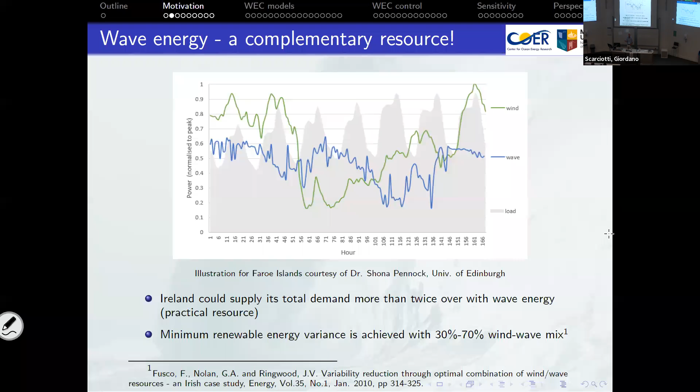Now it's not always the case that wave and wind are uncorrelated, and when waves are generated by local wind, they're highly correlated. But for example, on the west coast of Ireland, the waves come from storms and weather systems that are in mid-Atlantic. So there's actually quite a low correlation. And to minimize variability on the west coast of Ireland, we would have a mix of 30% and 70% between wind and wave. So it's predominantly wave. Wave and wind are both variable and unpredictable, while tide, for example, is variable but predictable.

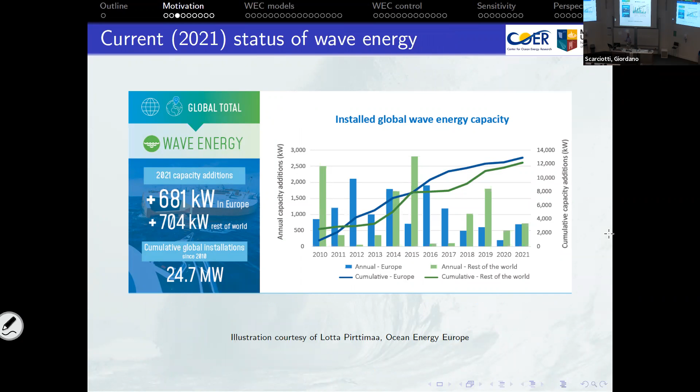In terms of the amount of installed capacity, it's very low. I mean, the total global installed capacity is actually lower than the 24.7 megawatts on the diagram here, because that doesn't include the systems that have been decommissioned. And even the aspiration in the future is not that high. I mean, 500 megawatts by 2030 is really only the size of a medium-sized power station.

The important aspect here, though, is the cost. So the figure of 110 euro per megawatt hour would correspond to about 11 euro cent per kilowatt hour, which is about half the retail rate at the moment. And it would probably bring wave energy into a competitive line with, say, offshore wind. Onshore wind is probably a little bit lower than that.

So really, it's about the cost of energy. Of course, the wave energy resource itself is free, but the cost of converting it is not. So it's really about maximizing, and it's not an efficiency issue either. Some people who work in this area get obsessed by efficiency. It's really purely a cost issue.

So why is it so hard to harness wave energy? Well, the energy in waves is a mixture of potential and kinetic energy, and therefore there are a variety of principles that you can use to harness it. And it's not clear what the optimal harvesting principle is. It depends whether you're in deep water or in shallow water. And there is absolutely no technology convergence. There have been over 200 prototypes reported, and they all look a little bit different.

One of the difficulties is that the energy flux is reciprocating. So at some stage, in order to use it usefully, we have to rectify that either at the hydrodynamic stage, the mechanical stage or the electrical stage. High force, low velocity; generally electrical generators like high velocity and low force. And also there are mechanical stresses, which often lead to over design as well.

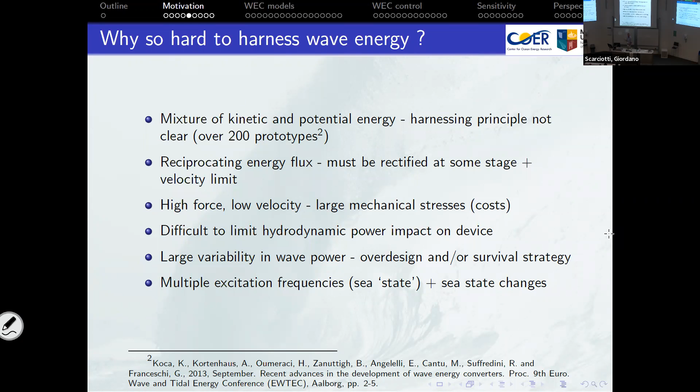Finally, the excitation that a wave energy device receives is across a range of frequencies. So all of this breadth of operational domain makes it quite hard really to get a device that can be well tuned to the local conditions.

So as promised, here are some pictures of wave energy converters, and they all look a little bit different. On the top left, we have an oscillating water column. As the waves go up and down inside the chamber, they induce a reciprocating airflow through the turbine, and people have designed clever turbines that turn in a unidirectional way despite the bidirectional airflow.

On the top in the middle, we have an overtopping device. It has a nice feature that the direction of flow through the turbine is unidirectional, so no other rectification is required. But for example, a 1 megawatt device of that type, which was deployed off the coast of Denmark, has got a 200-meter span and is really quite fragile. Top right, we have a heaving buoy, a two-part buoy where one part moves relative to the other, with a loose mooring.

On the bottom left, we have a flap type device, which is normally anchored in shallow water, and it uses the surge motion of the device. While on the bottom right, we have a hinge barge device where the central platform has got a heave plate to minimize its motion. And then we have relative pitch between the two end pontoons and the central device.

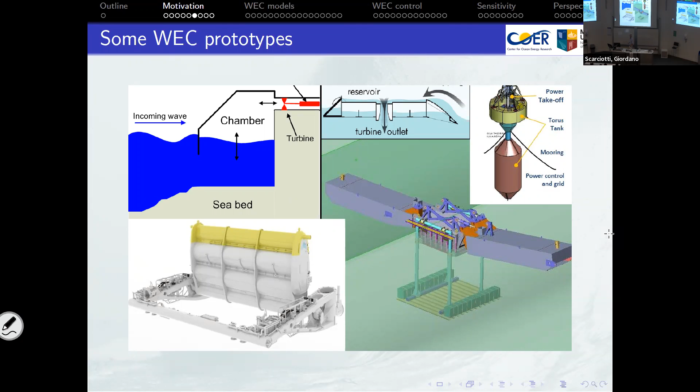I'll also give a special mention to this one. This is a device which has really only been considered for the last 5 or 10 years, and it's a lift-based device. So it probably has characteristics closer to aerodynamics than hydrodynamics. And one of the things that makes it interesting from a control systems point of view is the number of different control actuators that you can use.

We can vary the generator torque, as we can with most wave energy devices. But here we can also pitch the foil angles, and we can do that either to maximize power, but it also gives us a mechanism to spill power. We can also submerge the device by controlling DS, the depth of submersion. And finally, on some of these devices, we can also change the radius.

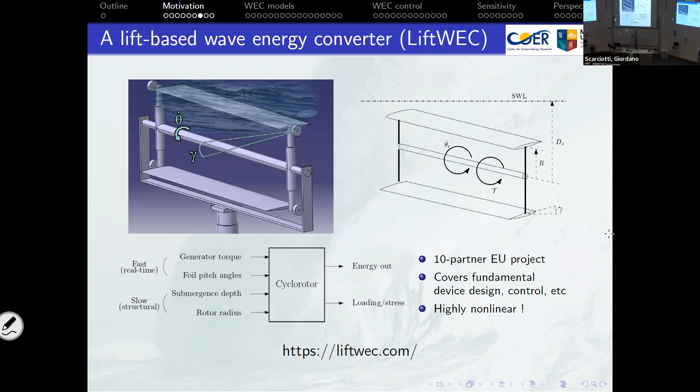Now, some of these are fast acting control mechanisms and some are slow, but it gives us a lot of freedom to play with. It's a 10-partner EU project. Our participation is on the control side; a highly nonlinear system, but it's, again, one of 200 different prototypes.

In terms of the wave resource, the wave resource is multi-frequency, and on the left, you can see the different wave spectra that result from different winds.

And we're assuming here that there's sufficient fetch for the waves to build up, and also that there's sufficient time for the waves to build up. So therefore, what we call a fully developed sea. But these wave models can be a little bit simplistic. So on the right-hand frame, you can see that we have a wave model from a Pierson-Moskowitz wave model, but it doesn't actually represent the sea state particularly well.

We have generally got some summary statistics that describe these wave models. So H1/3 is the average of the 1/3 highest waves, and that actually comes from historical reasons from sailors' observations, and that's equal to HS, which is the significant wave height. And then there's a sort of bulk measure of the period of the wave, or a representative measure, either TZ, which is the primary zero crossing period, TP, the peak period of the amplitude spectrum, or TE, which is the peak energy spectrum. And there's an example spectrum, which is Bretschneider.

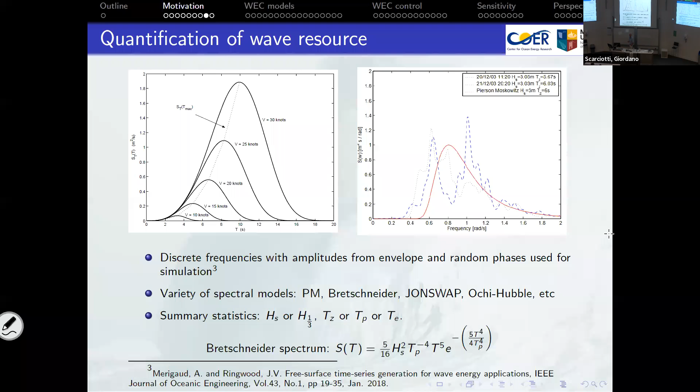So the challenge, and this ultimately is the control objective, although it needs to be distilled down to something that's a little more manageable, is to reduce the levelized cost of wave energy to compete not only with non-renewable sources, but also with renewables. And I guess the reason that I'm talking to you here today is that I believe that control technology has got a high role to play in reducing that levelized cost of energy.

Generally speaking, this LCOE term here is distilled down to energy converted, which is something that's more tangible in terms of control objective, but we also need to be aware that the control actions that we take may also affect the operational costs as well. In general, there isn't a huge relationship between control actions and CapEx, other than the addition of maybe some sensors and actuators. And maybe it trivializes things a little bit, but control is primarily a design exercise that involves implementation and software, maybe with the addition of some extra sensors and actuators.

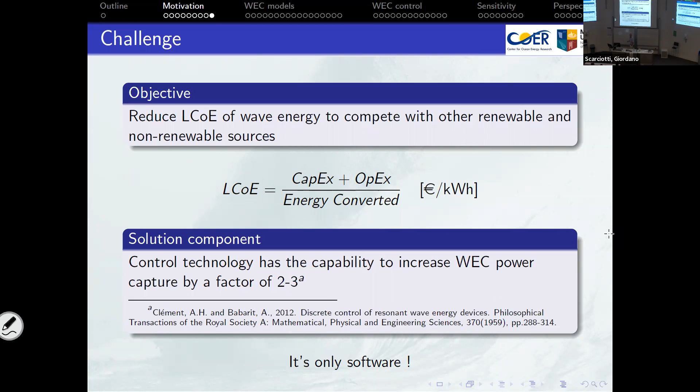So compared to the capital cost of a device, which would typically be maybe €1 million per megawatt, the addition of control capability that's able to sufficiently improve the energy capture performance of the device is certainly something that looks appealing. So I'm going to cover a range of WEC models, wave energy converter models, starting with the most complex and then coming to something that's really very simple. So we've something to work with, and we're probably all aware of the immortal comments of George Box, and he's right. But the important part here is the useful part, and there are a variety of uses to which we can put models in the wave energy domain.

So these are some of the different reasons that we need models. Certainly, project developers would need to be able to assess power production in a particular location to see if it's an economic proposition to put a wave energy farm there. Mechanical people need to assess loadings and forces under extreme sea conditions. And then we've a range of reasons to simulate the device. And they would particularly be fairly simple models because we put them in some sort of closed loop optimization strategy. And finally, of course, which is one of our main interests, is as a basis for model-based control design.

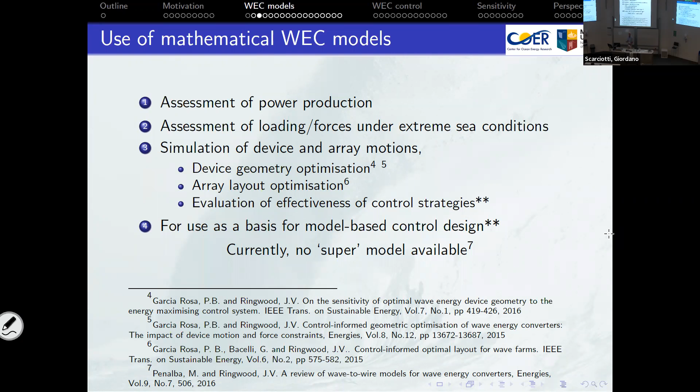One of the issues is that we have multiple changes in the form of power, and we may or may not have a hydraulic stage in here. So we may go directly from mechanical to electrical. Bond graphs are quite a nice way to model this. And of course, they have a close connection with Port Hamiltonian systems as well.

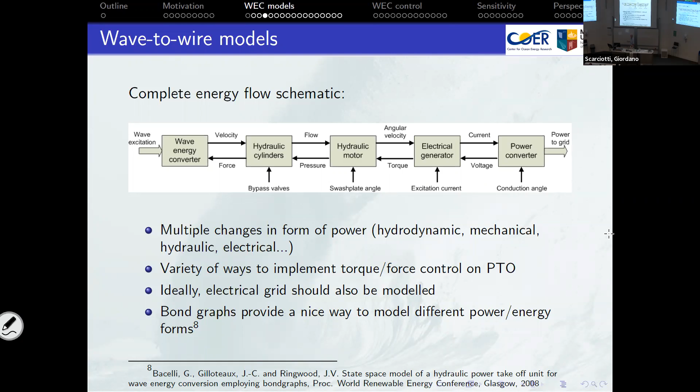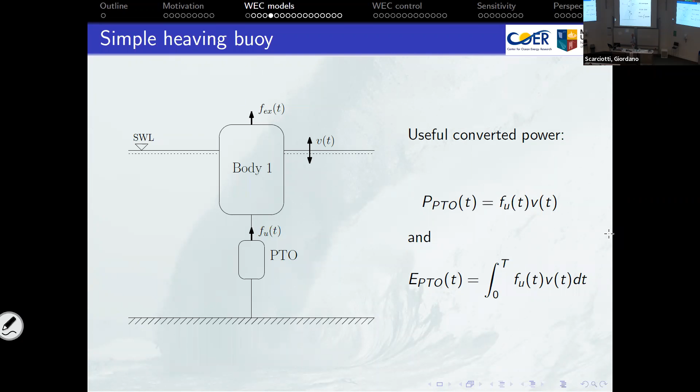And there is no known closed form solution, although I remember seeing a film, Gifted, which came out in 2017, and someone in that claimed to have solved the Navier-Stokes equations, but I haven't seen it published yet.

We can solve these equations numerically by discretizing the domain one way or the other, and there are different forms of discretization, whether we go down the computational fluid dynamics route or smoothed particle hydrodynamics. So these equations are then used to describe the interaction between the particles, or indeed the cells within here, and both of them are very computationally complex.

But we can simplify things a little bit if we just assume that the forces acting on the body are a linear superposition. We have mooring force. The radiation force is a force experienced by the device by virtue of its own motion. So devices in motion generate their own waves, and that causes a hydrodynamic force. The forces due to the wave excitation include the diffraction force and the wave excitation force. And then we have a balancing force between buoyancy and gravity. And we may or may not have a viscous damping force depending on the nature of the device. And we get to choose the control force F of U.

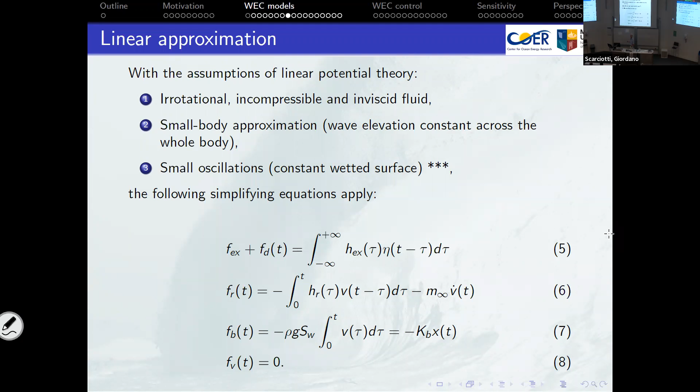So with some more assumptions, which include that the fluid is irrotational, incompressible, and inviscid, and we assume a small body approximation, which means that the wave elevation is constant across the whole body. And that's a reasonable assumption generally if the period of the wave is a lot longer than the characteristic device dimension. And then here's the really thorny assumption, which is that there are small oscillations, and I'll show you how they're really challenged in the wave energy domain. Then we end up with these expressions for these hydrodynamic forces, and of course we end up with these two convolution terms, and they form the celebrated Cummins equation.

So Cummins equation was developed in the 1960s, and is really employed by most people who work in the control area, simply because of its simplicity, but there isn't a simpler model available, in fact. We can simplify it a little bit further. Usually, instead of this convolution integral, we substitute that with a finite order dynamical model. And these quantities here, HR and HEX, are impulse response kernels that are produced in non-parametric form by one of these boundary element techniques here, and they can be produced either in the time domain or in the frequency domain.

Eta is the wave elevation, so that describes the wave excitation on the device. And again, here's our control input here, F of U. This term here, M infinity, is an added mass term. So as the device moves, it carries an amount of surrounding fluid with it, which increases its mass. So that's where that comes from. And there are a whole variety of techniques to produce this finite order approximation, including one developed by ourselves.

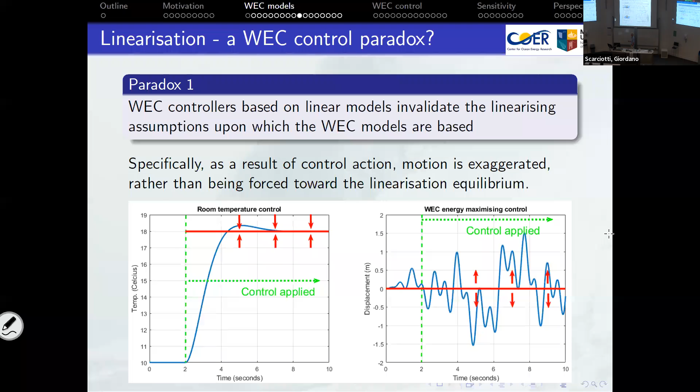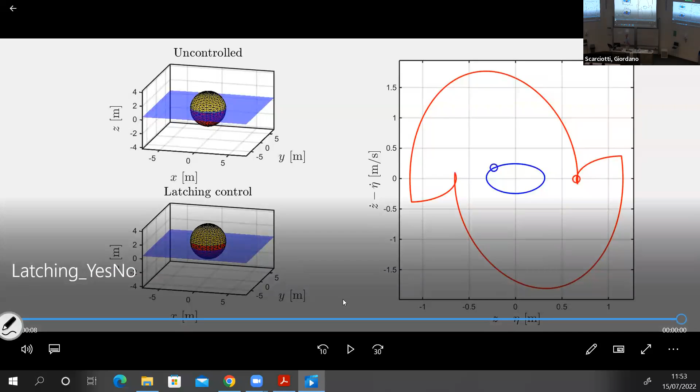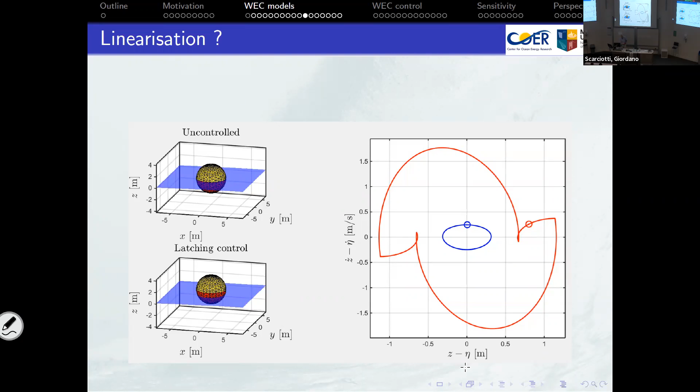So on the horizontal axis here, we have the relative displacement between the fluid surface and the device, and on the vertical axis, it's relative velocity. So relative velocity, as it gets large, generally generates viscous drag, which is a quadratic nonlinearity. And then we end up with what are called nonlinear Froude-Krylov forces, which are wave excitation forces, as this becomes large. So with a larger operational space, we're likely to excite nonlinearities, which again is a challenge for both modeling and control.

I'm just showing you a range of different modeling strategies here, with CFD being the sort of gold standard. So in terms of the computation and fidelity plane here, we have CFD here, which is the gold standard. And I'm not going to go through all these models in detail, just to mention that they increase, let's say, in complexity and in terms of nonlinear capability. But the important point here is to watch how they validate either under controlled or uncontrolled conditions.

And under uncontrolled conditions, in fact, they all work pretty well. So in terms of fidelity, they have a fidelity close to CFD. But as we control the system, most of the models fall away, with really only this one approaching the fidelity of CFD. So in fact, by controlling the system and maximizing energy capture, we're creating a difficulty for ourselves.

So this is, I guess, a picture that's familiar to everybody, but maybe it presents an alternative to getting around all these fundamental difficulties in modeling a wave energy converter from first principles. So to generate a data-based model, we have the usual considerations, except I guess in terms of the experimental scenario, we have a few unique features. We can either use a numerical wave tank, which is based on CFD or SPH, or we can have a real tank where we can control the waves, or we can go to the open ocean.

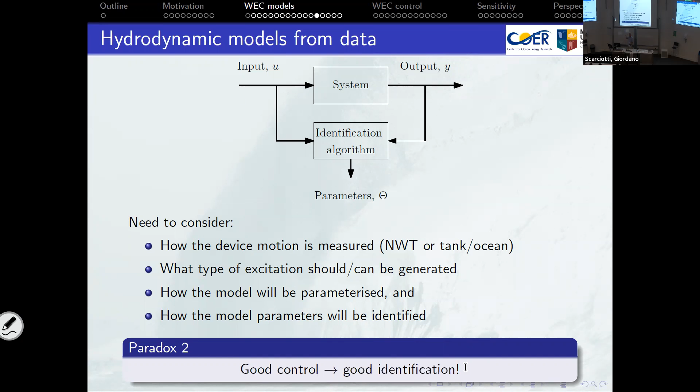But in the open ocean, of course, we don't control the waves, and sometimes it's difficult to actually measure the wave climate as well. So then we can consider what sort of excitation, and again, this is a little bit unique to the wave energy case, what sort of parametric structure we choose for the model, and then how to identify the model. But the good news here is that generally speaking, because of the aggressiveness of our wave energy controller, and indeed the persistence of the wave excitation, good control, or indeed even the benign situation, generally leads us to good identification. Whereas with a traditional control system, if we control it well to a set point, it means that it's quite difficult to identify.

So in terms of the sort of data we can take from a system to identify the model, we can use the normal motion of the system under waves, or indeed put in our own identification signal via the power takeoff system. We can do a free response test. We can have a response just to some other wave excitation or power takeoff excitation, or have a combination of these. So here we can see the different ways that we can inject things into the system.

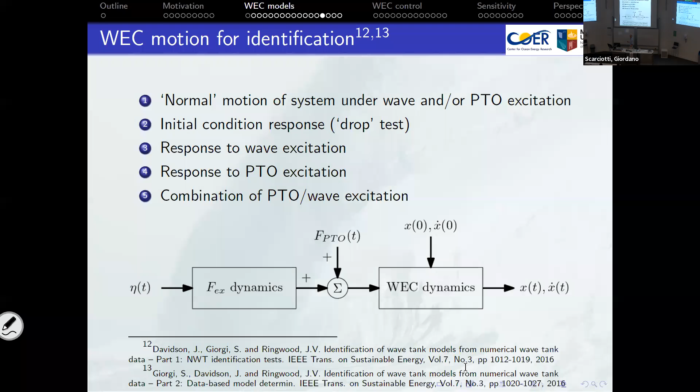So here we have eta, the free surface, through the hydrodynamic model, which gives us a wave excitation force, which adds on to the power takeoff force. And then we have the possibility again to change initial conditions. And generally, we're interested in the model here from the force input to the motion of the system. This shows the idea that rather than linearizing around the equilibrium point with the assumption of very small variation, we could linearize around the equilibrium point, but not assuming a small variation.

So we have what I call a representative linear model. And the example here is just from initial condition response tests, and you can see those here, although it's quite difficult to see how they differ from each other until you normalize the amplitude here. And then you can see that the ones which have quite a small initial condition variation, they ring a lot more than the ones from a larger amplitude, which are subject to much more damping, and that generally is viscous

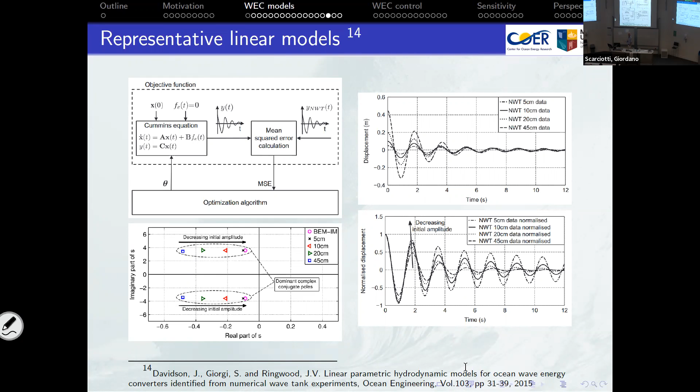damping in the fluid. And if you look at the dominant poles of the system in the complex plane, in fact, the pink ones here are the ones that you get from this sort of physical modeling through the assumption of very small variations. And you can see that when you plot the dominant poles from these tests here, they actually converge on this one as the initial amplitude gets very small. So that gives us the possibility to have a range of linear models that are good for different amplitudes, and we could either interpolate between those models or switch between those models potentially.

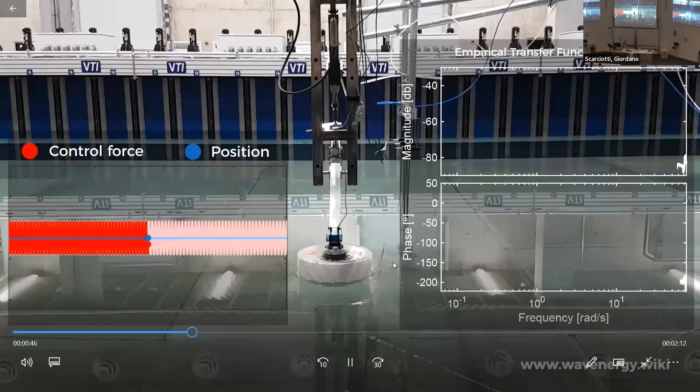So we do a down chirp, and the reason we do that is because small frequency waves generally have a much shorter reflection time. And this is a big issue in wave tanks. Wave tanks normally have wave cancelers, either the wave makers themselves actually work as wave cancelers, but also there's usually some sort of a beach that kills the waves as well. But inevitably you do get contamination from reflections.

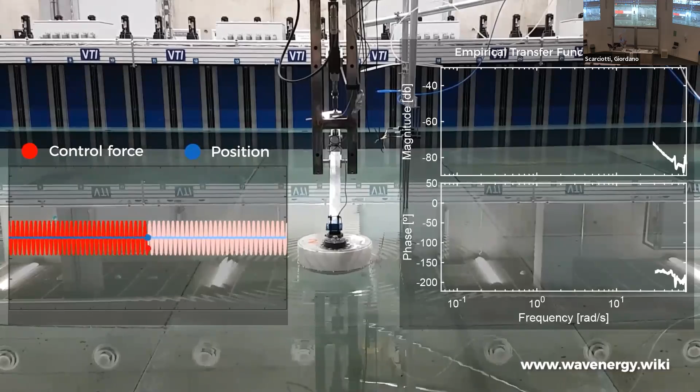So you can see here as we start in high frequency, really there's very little reaction in the device. And then as we go down in frequency and we start to approach the resonant frequency of the system, you can see that we get a much more significant response. And then as we get right at the resonance, we actually get overtopping of the device and quite nonlinear sort of behavior.

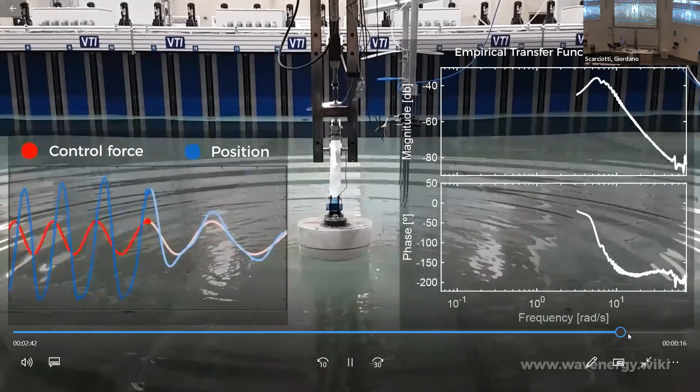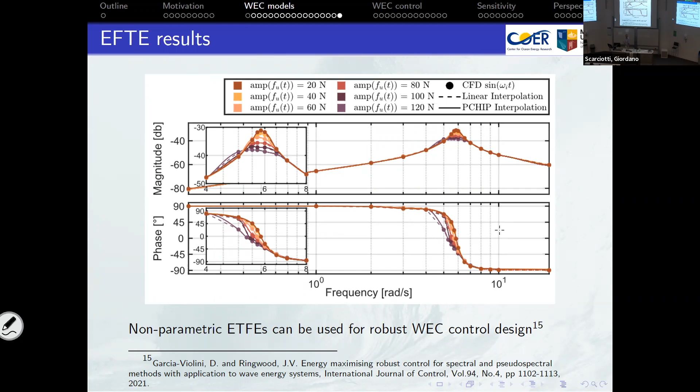And the sort of responses that we get from this are then documented here in a Bode plot. So you can see that they're documented for different amplitudes of chirp signal. So we get a spread, and they're useful for different sorts of control design, including a version of a robust control design that we've done, which is based on the best worst case analysis. But it also feeds into another form of controller that we have as well that I'll show you.

So on to WEC control then, and I'm going to start with the very basics, and some of this may be obvious to some of you, but maybe not all. In terms of the objective then, as I mentioned, the really high level objective is to minimize the levelized cost of energy. But again, that's usually distilled down to maximizing energy absorption over an interval T. Power is given by the product of force and velocity, and energy is the integral of that.

And of course, the system has got some real physical constraints, particularly in terms of displacement. It usually has a finite stroke length if it's a heaving buoy. It may have velocity constraints as well, and there's definitely a maximum force that we can induce with the power takeoff as well. And then finally, there's a somewhat unique constraint that we might need to apply as well, which is a constraint on reverse power flow. And you can say, well, why would there be reverse power flow? I mean, surely we're trying to harness energy rather than put energy into the system.

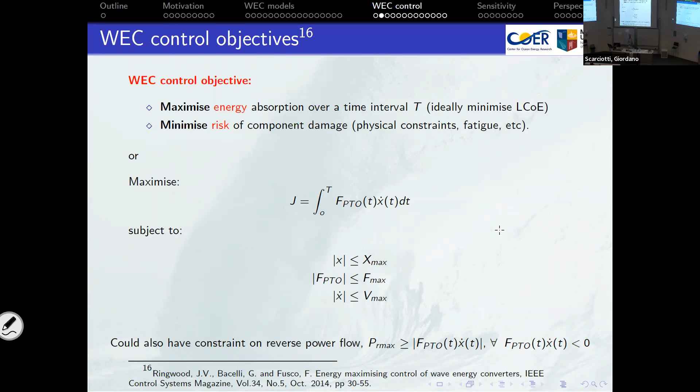But it turns out that even for a simple harmonic wave, there's a period of that wave that if you inject some energy into the system, you actually get more back. And it's very similar to what a child or indeed an adult does on a swing, that you kick your legs out at one point in the cycle. And the timing of that is absolutely crucial. And by putting that energy into the system, it then sustains the motion. And the reason we would put a constraint on it is sometimes these reverse power flow peaks are actually higher than the rated power or the forward power capacity of the system. So that's why we need that constraint.

Okay, so in terms of the fundamental contributions to wave energy control, they arrived in the 70s from the likes of Stephen Salter at the University of Edinburgh, and Kjell Budal and Johannes Falnes at NTNU, and David Evans from the University of Bristol. But it's interesting that Stephen Salter and Kjell Budal, Johannes Falnes were all from departments of physics, while David Evans was an applied mathematician. So there's certainly ample opportunity for control people to get involved and to look at this in a concerted way.

Their initial focus was on monochromatic waves, and there are all sorts of parallels, in fact, because we're dealing with resonating systems in AC circuit analysis. And in fact, at a workshop in Torino 2 months ago, somebody reinvented the Smith chart. So those of you who have an electronic engineering background will be familiar with the Smith chart from electrical transmission lines. But this guy who had his background really in hydrodynamics had no concept of it, and reinvented the wheel in a different domain. And it's not unusual in the wave energy community.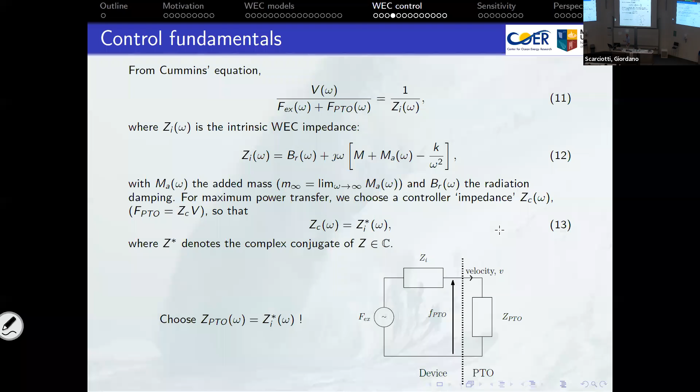And this is termed the intrinsic impedance of the system. So it's similar to what you would imagine in an electrical circuit as the internal impedance of an electrical system. And it's a mechanical impedance generally, and it's the ratio of force to velocity. And any of us who have done basic AC circuit analysis know the answer as to how to maximize power conversion or power transmission from this system, which is the wave energy converter, into the load, which is where the useful power is. And that's by choosing the load as the complex conjugate of the intrinsic impedance of the system. So that's a simple choice.

We can formalize that then in a feedback structure. And indeed, we can parameterize the power takeoff force in terms of similar quantities that we have in the model. And this looks very like a PID controller. And indeed, it is the most ubiquitous controller in wave energy, in the same way that PID probably is in the more general control community. The difference is that the controller is not driven by an error, but it's driven by velocity.

So if we then choose the complex conjugate, you can see that the controller impedance is expressed by these terms here again, involving these hydrodynamic coefficients. To get the complex conjugate, we really just need one real and one imaginary value. So we don't actually need both of these, and we can choose which one. But what it does is it gives us a nice visibility into how we can do control co-design.

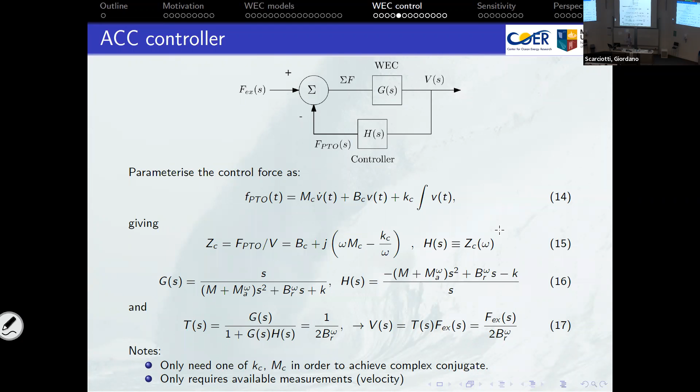So in fact, if we want to change the mass of the system, or we want to change the damping in the system, we can do that either with the physical system, or we can do it virtually via the controller parameters. Of course, as we vary these things, it may have implications for the maximum power takeoff force. We need to be a little bit careful about that. Okay, so that's a basic controller. The problem is that it only works at a single frequency.

And it doesn't give us any ability to handle the constraints that I mentioned at the start in relation to displacement, particularly, and force. So we developed what we call this LiTe-Con controller, which is a linear time invariant controller, so it's a fixed controller. And what it does essentially is try to determine the complex conjugate of the system across the whole frequency range. And that ideal controller is the black one here, which in fact is unrealizable. So the closest realizable one you can get is this blue one here. And then with this controller, we can also put in a constraint handling mechanism because it's got this feed forward structure here.

And you can see what happens as to the frequency response as we vary that. And K, this free parameter here, which helps us to do constraint handling, is based on some real-time wave statistics. Now, one of the difficulties is that you can't implement this multi-frequency impedance matching controller in a feedback form. It's consistently unstable. So we have to use the feed-forward form.

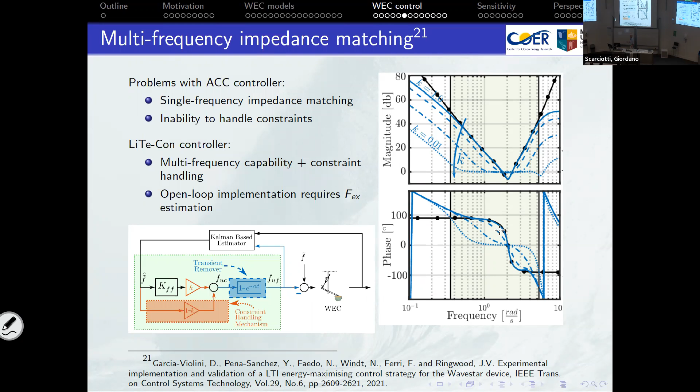And the difficulty with that is that we need to know the wave excitation, which in fact is an unmeasurable quantity. There is no sensor that you can build to measure it. So it has to be estimated, and there are a variety of estimation methods we can use, including Kalman-based estimators. Sorry. So this just formalizes the feed-forward structure.

So the first controller structure, the feedback structure, is called ACC, or approximate complex conjugate control, while this is approximate velocity tracking. And this structure gives us a lot more freedom, especially in how we can manage constraints, the sort of models we can use, but it does come with the disadvantage that we need a measure of the excitation force.

So there are two parts to the control. Then we have an estimate of the excitation force. We solve this control problem here to determine the optimal velocity reference, which is going to capture the maximum amount of power. And then we use the controller K2 to make sure that the system achieves that velocity reference.

Yeah, there are a variety of ways now that we can design K1. And one of the ways we can do that is via numerical optimization. And of course, we can use constrained numerical optimization to recognize the constraints in the system. And the only difficulty is that as we implement this in a sort of receding horizon fashion, then we need future values of the excitation force. So not only do we need to estimate it, but we also need to forecast it into the future.

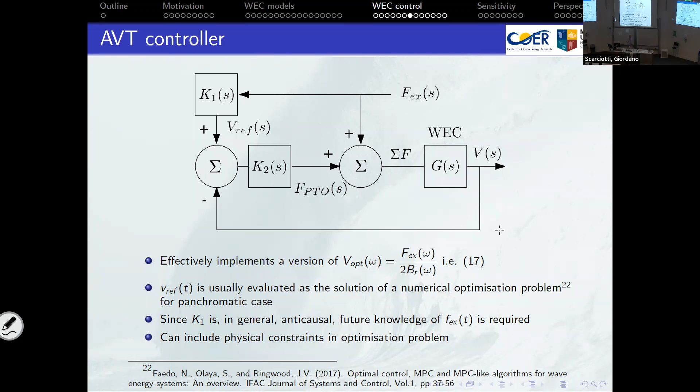Okay. So one possibility, and there are quite a few examples where people have applied a somewhat traditional MPC type controller in a receding horizon fashion to the wave energy problem, of course, using a different objective function. So it's not an error tracking or an error minimization controller. It's trying to maximize this energy function, which actually ends up being a non-convex problem in a fundamental way when expressed in an MPC form.

So one of the things we looked at is transcribing the problem into a different space using some basis functions. And we recognize that most of the signals in the system are harmonic or multi-harmonic. So it makes sense to use those type of basis functions that might allow us to operate in a different parametric space. And here we just show a sample wave signal, or it could represent velocity or displacement within the system. And we've arranged different functions that we can use to approximate that.

The zero order hold one is the blue, and of course, as the sampling period gets very short, we get a good estimate, but then our computation goes up. And if you look at the fit that we get for a number of basis functions, these half-range Chebyshev Fourier functions seem to work very well. Fourier functions we can use as well, and they can work in some instances, but of course we get discontinuities at the leading and trailing edge of the prediction window.

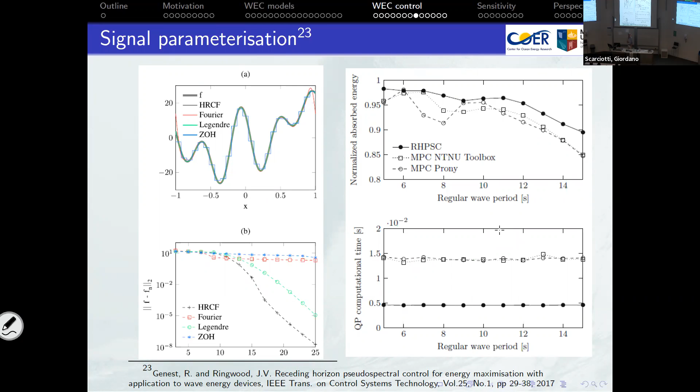In terms of the performance of these type of transcribed problems solved in that domain versus more straightforward MPC, we generally get at least as much power captured. But the most important thing is we've reduced the computation by a factor of 3, which is very useful if we're doing online optimization. And in fact, working with people in Imperial College here, including Giordano and Alessandro, we've utilized the moment domain to great effect.

So one of the key moves in the moment domain is the signal generator here, and we can choose that signal generator to best match the nature of the signal. So again, we can choose a harmonic signal generator, and that provides a nice integrated framework to solve the problem. And importantly, what might be seen as a restriction of just dealing with the steady state response in fact suits us very well in this application, because we're not really interested in the transient response. And yeah, I can show you the controller in action.

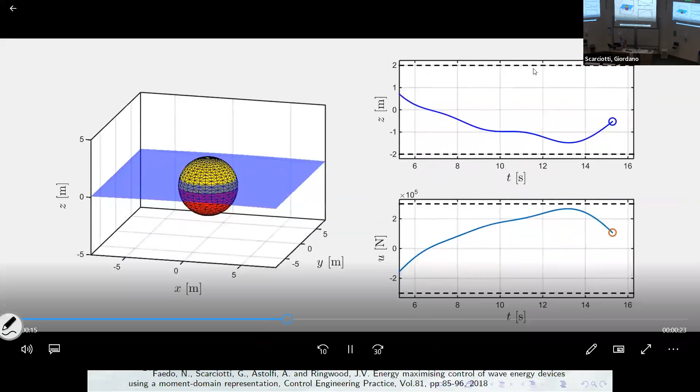And also one of the important aspects is that the problem is now a convex problem. We've also solved the nonlinear control problem for certain classes of nonlinearity, and that's a convex problem as well, which is quite important.

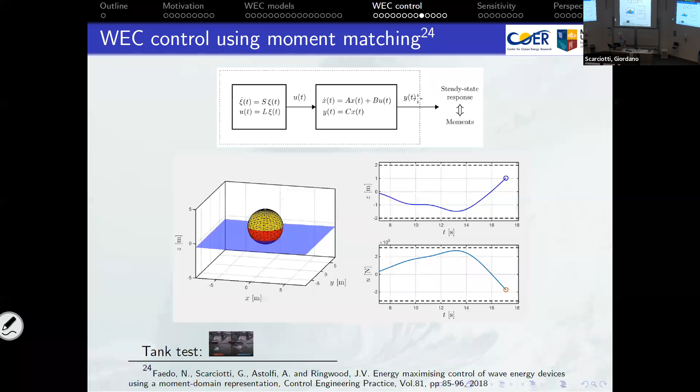And here we have a tank test. Maybe difficult to see exactly what's happening here, but on the left-hand side, we have the free body with no control force attached. And on the right-hand side, we have the moment-based controller. One of the important differences I just want you to see is that the phase of both of them is really quite different. And of course, in the control case, we can respect the system constraints as well.

So the one on the right-hand side is maximizing the power capture, and the power takeoff is in this linear motor up here. Again, for some of the stroke period, we're actually putting energy into the system, but overall that gives us more energy back.

Okay, so in terms of a framework, the moment domain has really proved fantastic for us. Not only can we do control, but of course, in terms of the group in Imperial College, it's been popularized in terms of this ability to do linear and nonlinear model reduction. So we can do linear and then nonlinear control based on those. We can do some robust control. We have a receding horizon implementation, and we can also extend it to the control of arrays. And currently we're working on constructing estimators and forecasters within the moment domain as well.

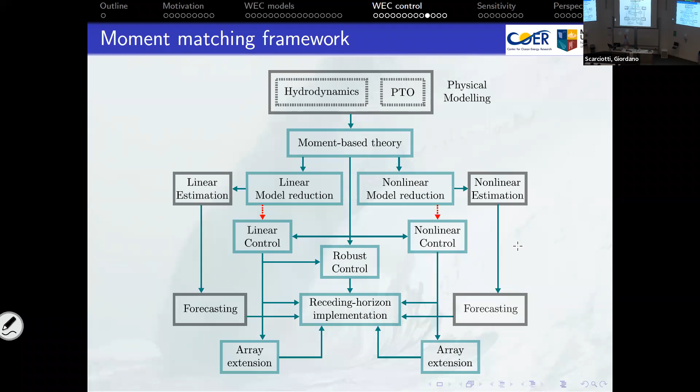So the business of estimation and forecasting is not quite trivial, but it's not impossible. There are a variety of ways of building estimators, and they're documented in this reference here. And in terms of forecasting, we've two options. We can either make some upwave measurements using data buoys and anticipate what's going to happen on the wave energy converter. We then need a model, of course, for the propagation between the two locations. Or we can just try and estimate the excitation force from measurements of the device motion and use it as a sensor. And that's really the most popular one, and certainly the simplest one as well.

We have compared both in this one here, and there seems to be very little added value in doing that, at least for a wave energy converter that was commissioned on Pico Island in the Atlantic. And we've constructed what we call an optimal forecasting framework under the assumption of Gaussianity that tells you that if you want a certain prediction horizon at a certain fidelity, you have to put wave sensors in the water at certain locations.

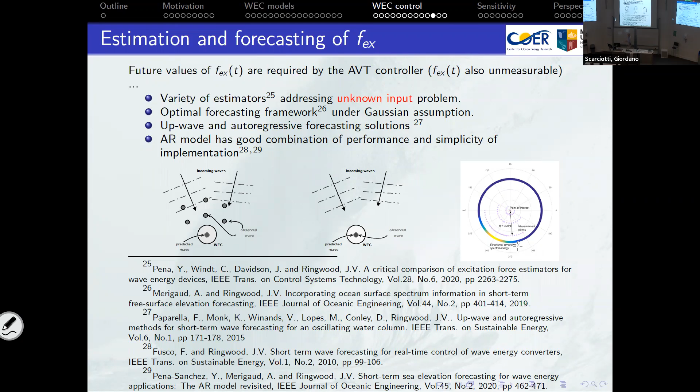But finally, in terms of forecasting, the autoregressive model actually seems to perform really quite well in this application. Now, a lot of people might imagine that renewable energy is an obvious candidate for extremum seeking control, because you know what your target is, which is this energy function here. So you just measure the energy coming out of your system, adjust the control on the basis of that, and forget about the model. And indeed, it works quite well in some applications, for example, in solar PV.

But the difficulty in wave energy is that the wave statistics are such that it takes quite a while to get a statistical measure of what your control is doing over all those frequencies. So here I just showed the performance function evaluated for 10, 100, and 1,000 peak waves. They're sort of pseudo peak wave periods. Remember that the wave signal is panchromatic. And you can see that until you get to something like 100 peak wave periods, it's not getting to a searchable state.

And of course, we want to control the system not only wave by wave, but also intra wave. So we want to control it second by second. So this really is quite a challenge, given that we can only get a decent performance function evaluation after a period of time. So it's an ongoing piece of work, and it's an area that we could certainly use a lot of help with if anyone has any ideas.

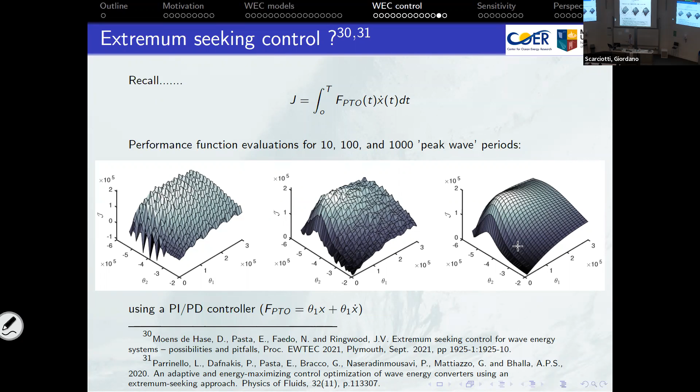Control of wave energy converters is an important one, because the same as wind farms, commercial deployment of wave energy will be in farms. But unlike wind farms, where generally only destructive interference happens, wave energy converters can actually generate favorable radiated waves, or waves that are favorable to other devices in the array. So you can have both destructive and constructive interference.

So all the devices then effectively are actuators in terms of generating these favorable waves, and all of the devices are basically a set of sensors as well to be able to work out what's going on. So this is just a simple example here of a triangular array. We have a consistent spacing D between the different devices, and we look at the ratio of the power harnessed with a set of independent controllers to a global controller.

Now, as the spacing becomes very large, the radiated waves, particularly from circular devices, diminish very fast, because, of course, the wave energy is consistent, but as the circle of the wave increases, the energy density decreases significantly. So beyond a certain point where the spacing relative to the radius of the devices is about 10, there isn't a whole lot of difference. But certainly, again, the overhead is a bit of communication and a little bit of extra control implementation.

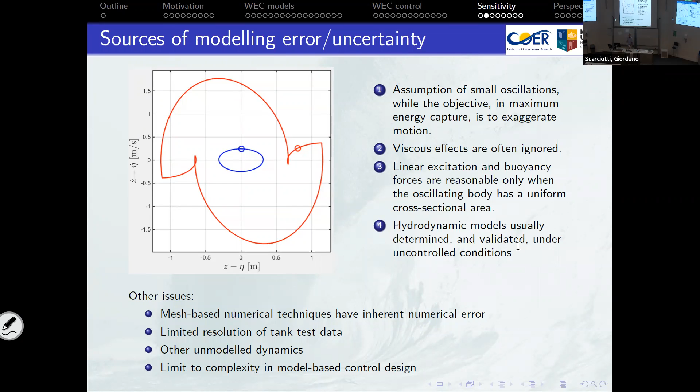So maybe just as a first stab, take a look at the closed loop system sensitivity, and this is a familiar looking term for a lot of people in the community here. Generally, what we try and do through robust control design is make the product GH large at either one or a range of frequencies, and if we can make the loop passive, then we can increase the gain and reduce the closed loop sensitivity. So normally we would expect the closed loop sensitivity to be far superior to the open loop sensitivity.

We could also calculate the sensitivity to each of the individual terms, which include the mass, damping, and spring. So we can look at sensitivity to particular errors in those hydrodynamic coefficients. And it's a little bit scary. These are all positive numbers here. So in fact, the sensitivity function is actually worse than the open loop sensitivity at most frequencies.

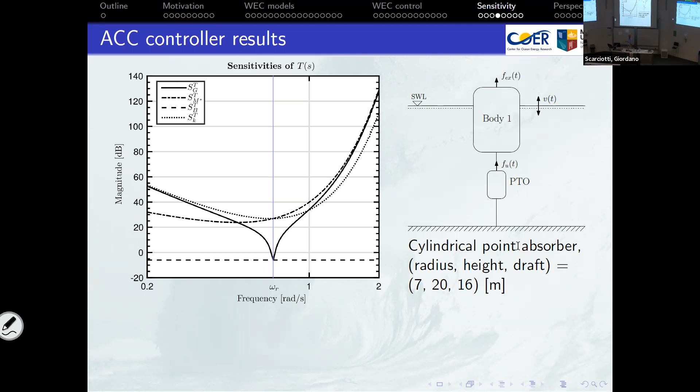The only frequency that looks vaguely reasonable is this frequency here, and that happens to be the resonant frequency of the device. But if you have the wave frequency at the resonant frequency of the device, in fact, there's nothing for the controller to do. So the controller is actually inactive at this frequency, and otherwise, the sensitivity function becomes quite large and a little bit worrying. So this is what I call the third paradox.

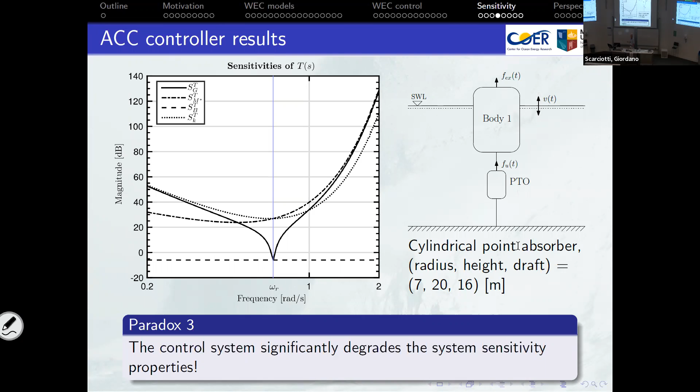In general, when you put a closed loop controller on a system and you have some freedom, at least in the choice of the feedback, you can improve the sensitivity properties of the system. The problem here is that, going back to the sensitivity function, the relationship between G and H is pretty fixed by virtue of their complex conjugate relationship.

So maybe there's an alternative metric that's a little bit more important. And so we start to look at the effect of those relative errors in either the real or imaginary part of the intrinsic impedance on the power production capability, because that's what really matters. So we look at the percentage error in the real terms, which would be the radiation damping, and then the imaginary terms, which would represent inertial or stiffness errors.

And then we calculate the ratio of the actual power produced under those perturbed conditions to the nominal case. And, as I mentioned earlier, we also have some robust control results for these devices to mitigate the effects of these.

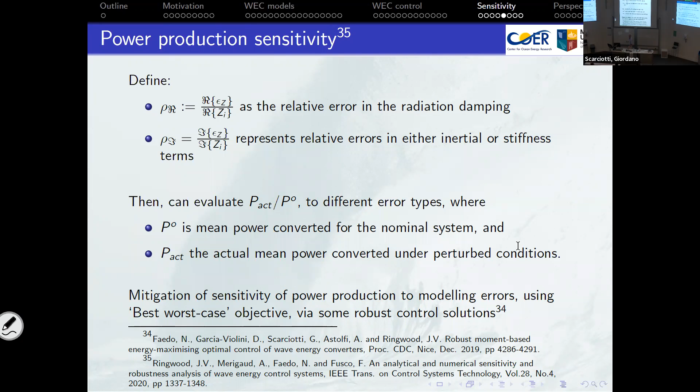But let's take a look at the sensitivities in power production. So we look at two controllers, the approximate complex conjugate feedback controller, or the approximate velocity tracking, which is the feed-forward controller. And for relatively small errors, we see that for the ACC controller, a 10% error in the damping term would lead to just a 0.25% change in the power produced, which is quite nice. And in the AVT case, it's a little bit worse.

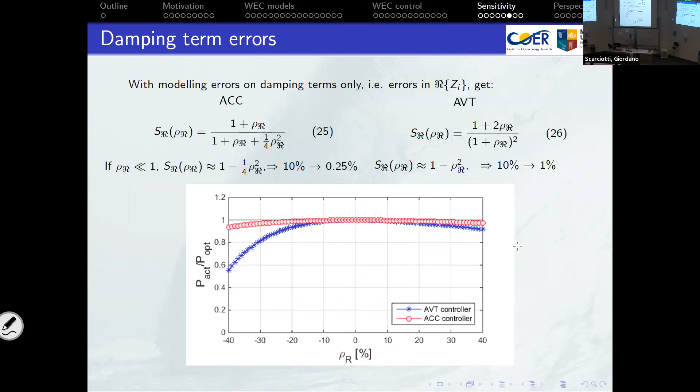And in particular, looking at the AVT case, which is the blue line here, you can see that, in fact, negative errors are much more costly than positive errors. So if there is uncertainty in the damping term, and you're going to use an AVT controller, you're better to overestimate it than to underestimate it.

In terms of inertial or stiffness terms, it turns out, in fact, that the AVT controller is completely insensitive as far as power production goes to those errors, while the ACC controller is super sensitive. So I've just shown 3 different wave frequencies here, 7, 9, and 12 seconds, bearing in mind that the resonant period of the device is 9 seconds.

And when the resonant period of the device is the same as the wave frequency, then this sensitivity doesn't look too bad. But once you move even slightly away from that, and this goes in both directions, both when the wave period is longer and shorter than the resonant period, you get a very quick drop off here in the power produced. So the penalty is quite large for inertial or stiffness term errors as far as the ACC controller is concerned.

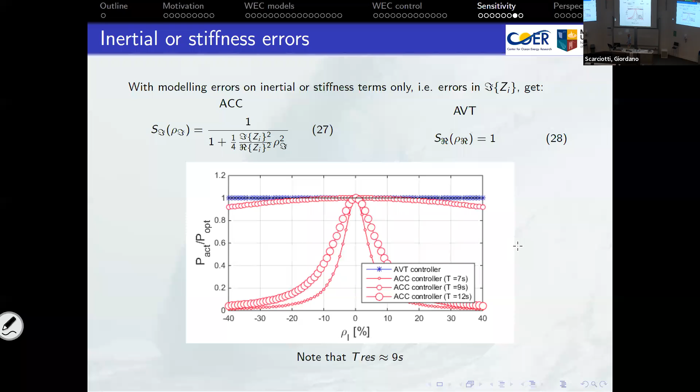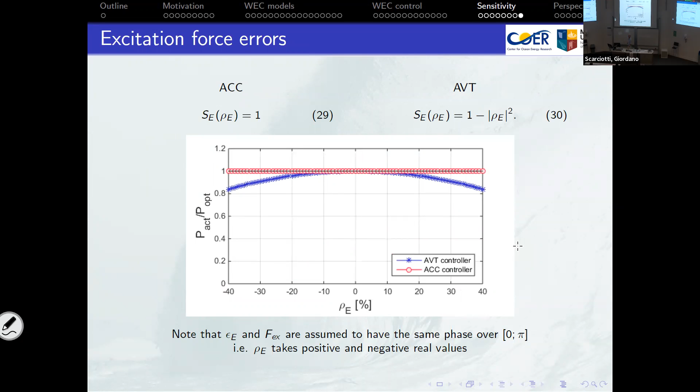And then finally, with regard to excitation force errors, of course, the ACC controller doesn't need an estimate, so it's completely insensitive to those type of errors, while there is, let's say, a moderate sensitivity in the case of the AVT controller.

Okay, so to finish off then, wave energy shares a control objective with other renewable energy sources, and particularly it's trying to reduce the levelized cost of energy. Again, the resource is free, the cost of converting it is not, and control technology can play a major role, I think, in reducing the levelized cost of energy. But levelized cost of energy is not a good end in itself.

You'll have heard numbers quoted, for example, when someone installs a new wind farm, they say, oh, this is going to power 10,000 homes, and they'll do that on average. But at any point in the day, it may be that they actually don't generate any electricity at all. So this is the concept of value of energy. And this is hopefully where wave energy can be of use in being a complement to other renewable energy sources.

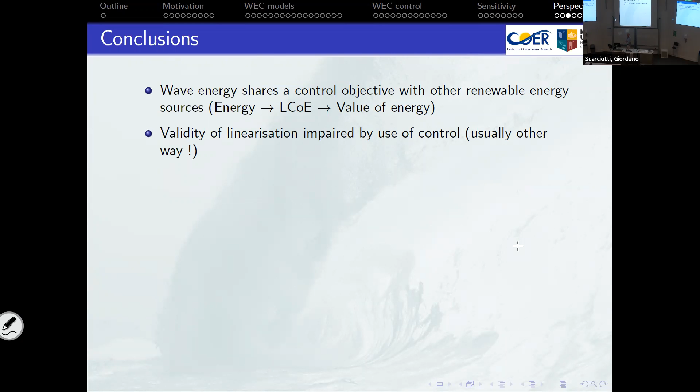As we've seen, the whole issue of linearization, and we all like linear models, is impaired, in fact, by the use of control, which is uncharacteristic generally of control loops. There's a variety of control solutions. I've only shown you really the outline of 1 or 2. They have various advantages and disadvantages, and they also may be unique or need to be customized for various devices.

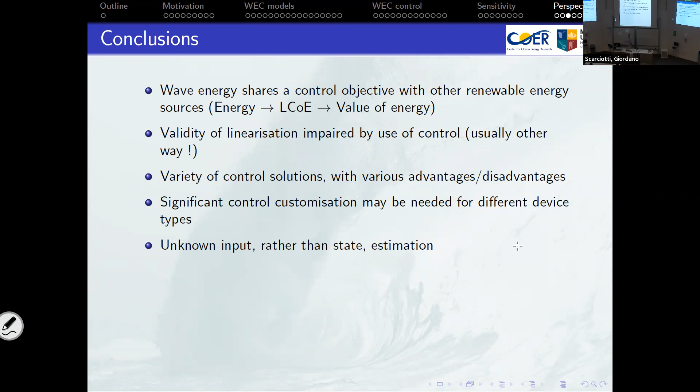And then we have an unknown input estimation problem, and also a forecasting problem, especially if we use the AVT controller, which gives us a lot more flexibility in dealing with constraints and different sorts of models. And also, we discovered a significant interaction between the control design problem and the device or array design problem.

So it turns out that the optimal geometry for a device is highly dependent on how you control it. And also the optimal array layout is highly dependent on how you control it. So it's very much a two-way interaction between the system and the control.

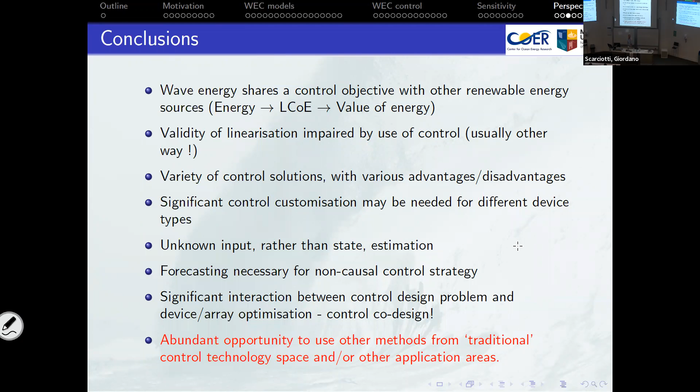And it's my firm belief that there's huge opportunity to use other methods from what I call traditional control technology space. And indeed, people that work in other application areas, I'm hoping that you may have seen something here that lights up a spark somewhere, and you can see some opportunity to migrate it to a different application area, because I think there really is huge opportunity.